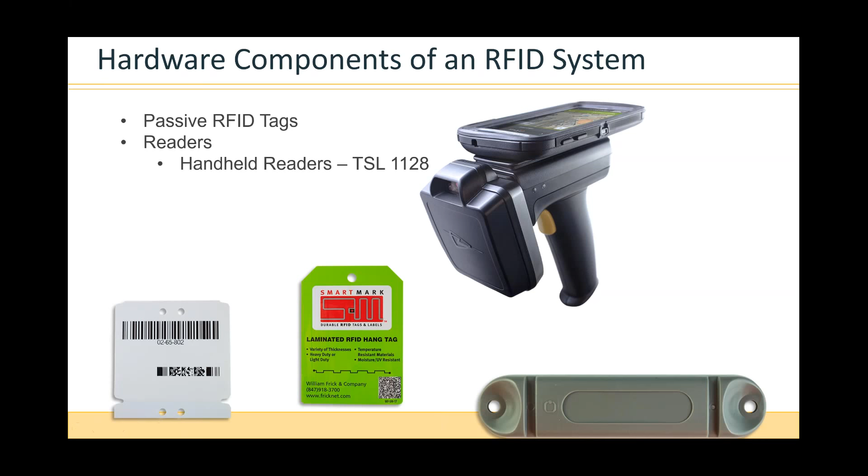So what are some of the components that make up a passive RFID system? Obviously you've got your passive RFID tags. That's kind of a no-brainer. You've got your readers. An example would be a handheld reader, like a TSL 1128. It's kind of a gun type reader. You've got an antenna here, and you've got a trigger to engage the RFID reader.

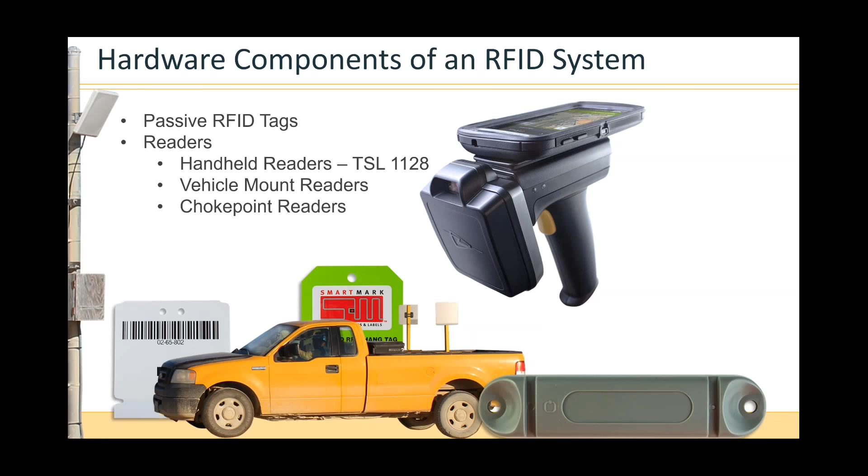You've got vehicle mount readers. So it's a truck that has antennas and a reader on the inside that can drive around your yards and pick up locations of RFID tags. Choke point readers. These are fixed readers at the entrance or exits of facilities that read tags. And obviously your mobile devices that compute the reads and push them into information for you to take action upon. So an example of a phone that could be used to pick up the RFID reads.

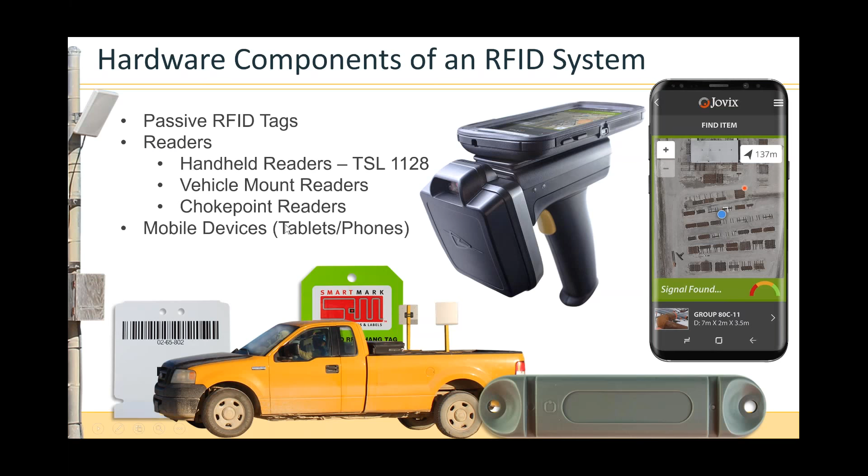So what are some of the tags that we're using in construction? Over the past few years, we've deployed millions of RFID tags out into the construction industry. And the three examples that I'm going to show up here are some of the most common that we typically put out into the market space.

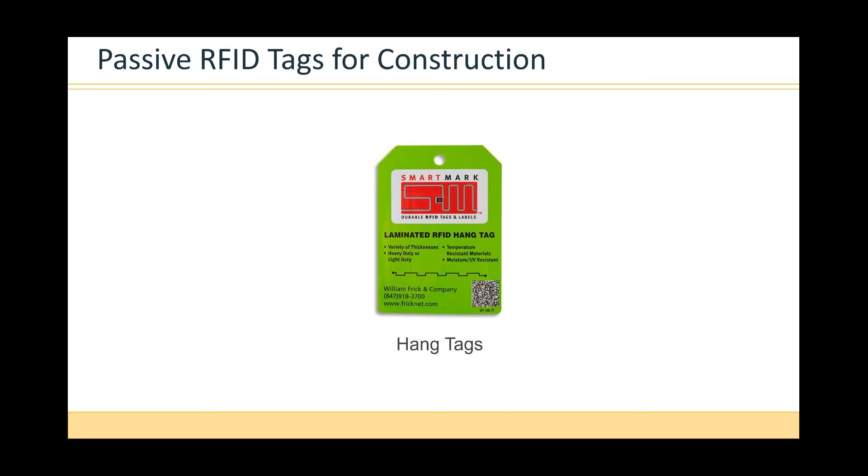So the first one here is called a William Frick. It's a type of hang tag. This is very, very durable, very thick. It's kind of a laminated type material. Temperature resistant and moisture and UV resistant, oil resistant. It's got a barcode on it for interacting with it. If you didn't have a passive reader, you could scan the barcode, and also having human readable content on the outside as well.

The next is a hard rugged tag, and this is an example of the XO 800 tag. It's an IP68 rated tag, so it's very durable. These are typically zip tied or chicken wired onto some pipe spools or onto structural steel. Could be zip tied onto cable reels. I'll show a few examples of that here in a minute.

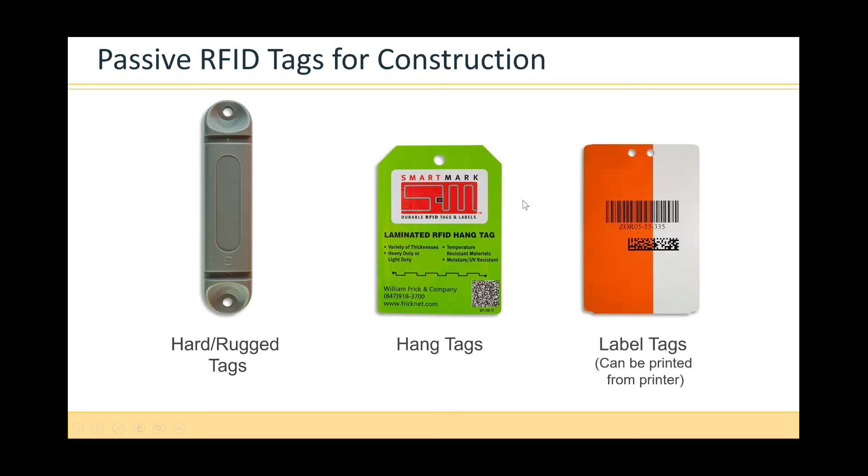And there's also label tags, so tags that can be printed from a printer, such as a Zebra printer, or they can print out rolls of different tags that can be adhered to materials, which also can have a barcode on the front of it and various bits of human readable content on it as well.

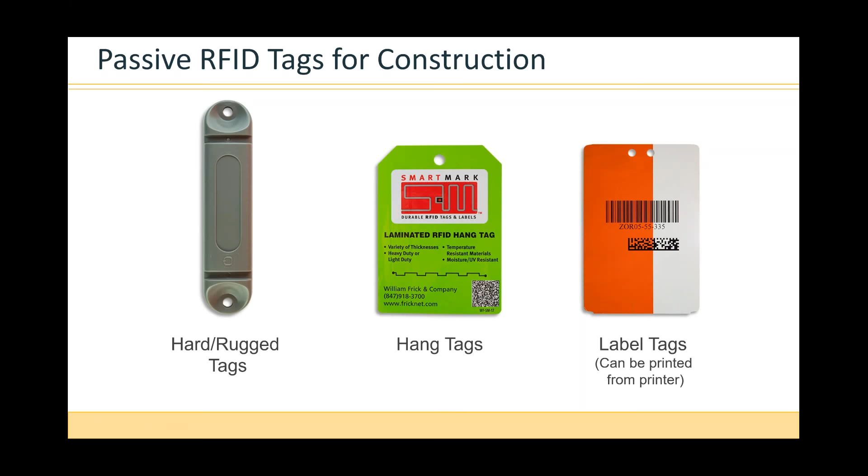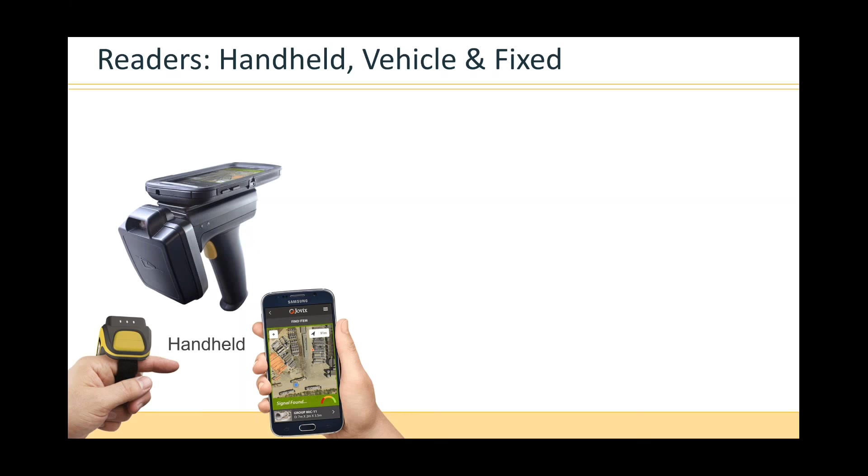And we have the vehicle mount reader. I touched on this earlier, but just get a little bit more in depth in this. So the vehicle reader consists of two antennas that run two antenna cables into a NEMA enclosure, which houses an RFID reader. That RFID reader is then run to a tablet in the cab, which computes the reads and then pushes that back to cloud-based software to update locations of assets in the laydown yard. All this can be hardwired directly to your battery. So when the car cranks up, the reader kicks on and away you go.

The next example of a reader are our fixed readers. These can be choke point readers at a fabricator shop or at a supplier shop, maybe at a marshaling yard, at your project entrance or exit. Even getting down into your laydown yards or work face entrance and exits to track your items via reads throughout your supply chain, whether it be intra-site or outside of your site throughout your kind of global supply chain, if you will.

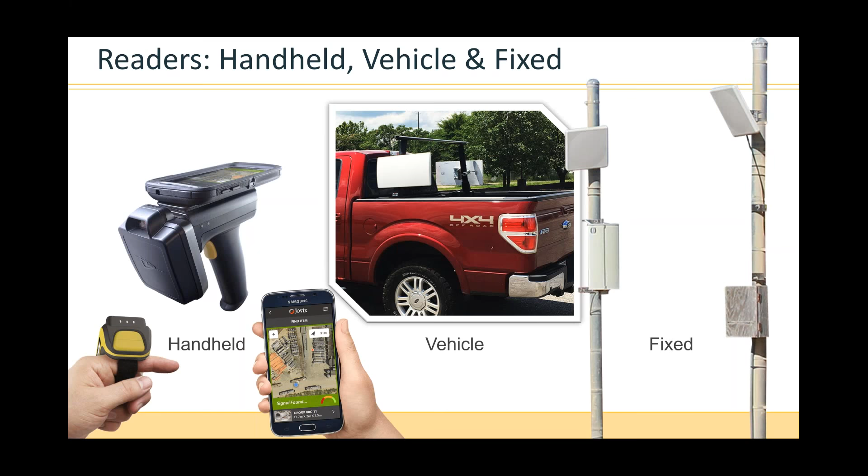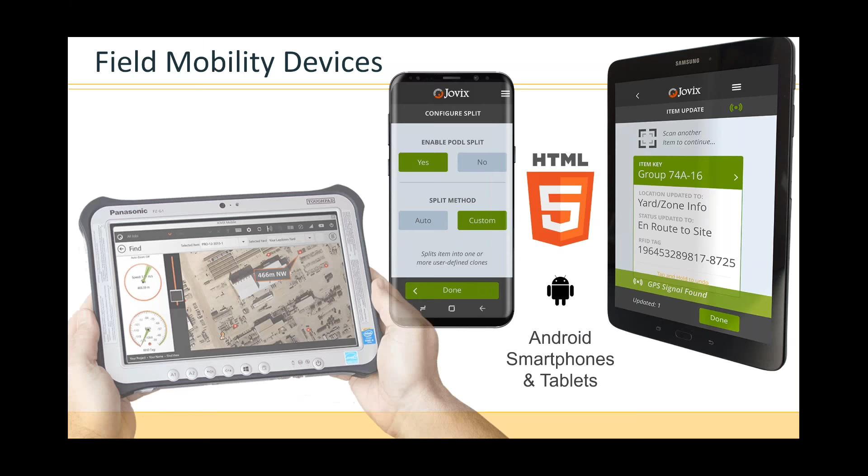So then you have field mobility devices. This is a major piece of the equipment as well that allows you to not only read the tags, but then compute that tag read into actionable data and conduct transactions with those materials throughout its life cycle. So these are two examples of Samsung tablets that are offered, and then your more workhorse type tablet would be your Panasonic ToughPad FZ-G1. Now this is our intrinsically safe type tablet that allows for use in an operating type capacity.

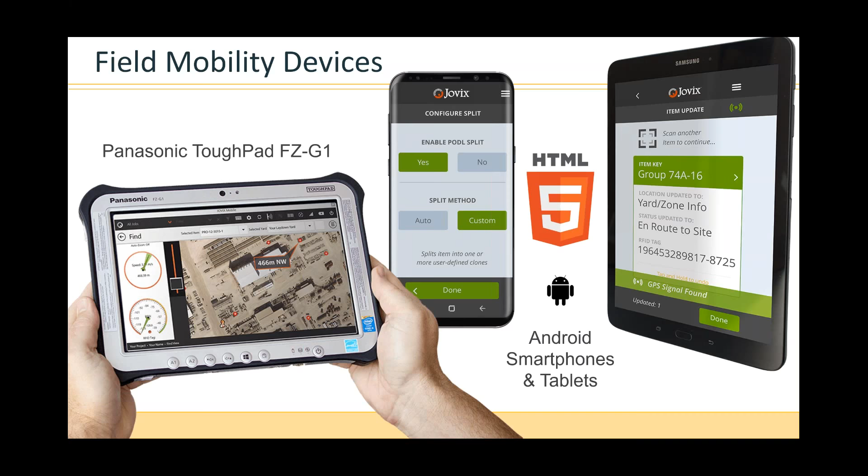So, I want to talk a little bit about testing, certification, and results. Before I go to the next slide, we've got a lot of great technology that I just went through and showed. Everything from a cheaper alternative RFID tag, a lower cost, to all the devices, to all the readers, and that's great, right? It's nice and pretty, but let's get to the real facts. Does it work in our industry? And that's been a major hurdle in terms of passive RFID tags in construction.

Some of the biggest hurdles are that it won't work because of the read range, right? The limitations of read range. My laydown yard is too big. I can't use it. They're all valid concerns, right? And you have the other concern of, I have a yard full of metal. Passive RFID tag doesn't work around metal. Well, we can sit there and listen to that, or we can actually go out and try and put a solution that does work. And that's really where we went.

And we started driving testing and certification and trying to understand, bottom line, the goal was feasibility. Can passive RFID tags be used in a construction laydown yard application? The answer is yes. I'm 100% convinced of that. We're convinced of it, and it's being used today to provide great results and great value. So let's talk a little bit about how we actually did that testing to confirm that it would work, right?

So I think there's a couple different things. You can have an RFID tag in a basement office or in a workspace where everything's real shiny and everything reads great. And yeah, you can say, okay, it's great, let's go sell it, right? But until you actually get out in the real world and put tags on materials, see how they work in a laydown yard, you don't have a solution.

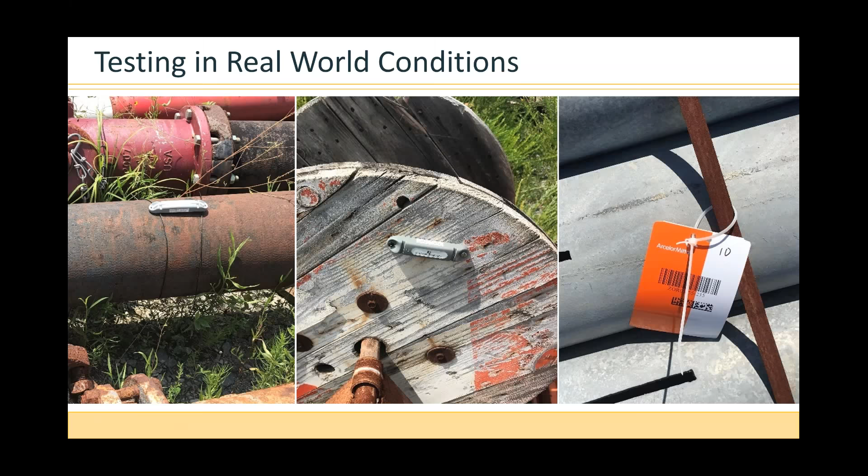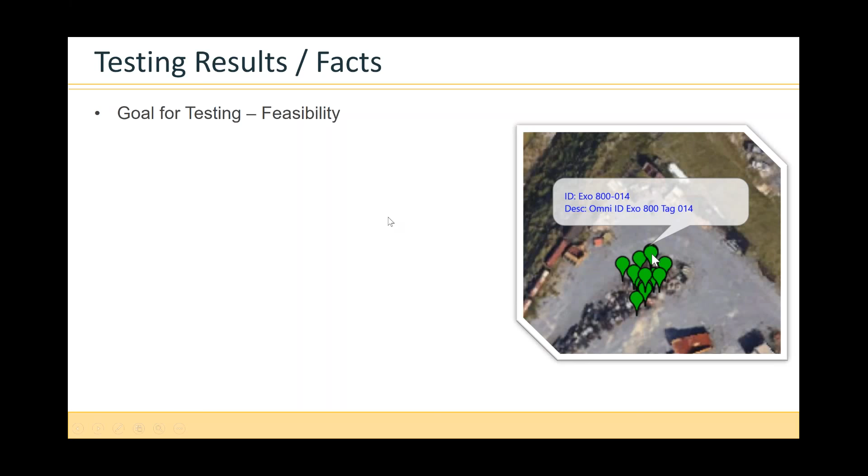But as I mentioned, the goal for testing was feasibility. So we thought to ourselves, we're not going to be able to test this without the help from a construction partner, right? So we're based in Birmingham, Alabama, and we got linked up with a local construction firm, SAIIA Construction, whose primary focus is underground development for residential and commercial. So they run a lot of the sewer pipes and a lot of the power lines for these commercial and residential developments. So they had a huge yard here in Fultondale that was full of surplus materials.

So they use these materials every once in a while, but most of the time they sat idle up there and nobody really went into the yard. So it's kind of the whole saying, one man's junk's another man's treasure, right? So we went out to this yard for a period of months, honestly, and attached hundreds of passive RFID tags to the materials in the yard at random. We hid some. We made them very difficult, covered in metal, just not the old happy path, right, sitting on top, because honestly, you're not going to have the happy path every time in the real world. So our testing had to be real world focused.

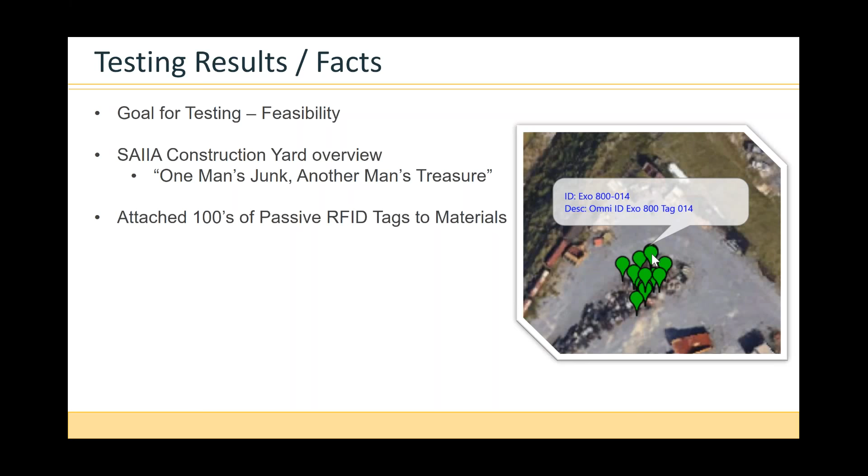So by putting all these tags on the materials, we also brought out our vehicle mount reader and then swept the laydown yards, located the tags, and did it continuously, and got averages of GPS distance, accuracy, and also the signal strength that was coming off of the tags, because the biggest misconceptions were the signal strength was too low and the tags will not work around metal. That was completely proven false.

We saw an average GPS accuracy of under 3 meters, which is incredible. So what that means is if you have a piece of material out in the laydown yard, you put a passive RFID tag on it, you sweep it, you can navigate to that within under 3 meters. Couple that with an RFID reader, and I'll show an example of this in a minute. You can get pinpoint accuracy on location of your materials with a passive RFID system in a laydown.

Some of the other facts that we saw, the longest read range that we had with the VMR, vehicle mount reader antenna, was 16 meters, which is pretty significant for a passive RFID tag. I think it's somewhere over 50 foot. I don't have a converter in front of me, but about 50 foot on that. And we were consistently reading at 10 meters. And that's significant right there. And I'll show why here in a minute, but the 10 meter consistent read range is very, very important.

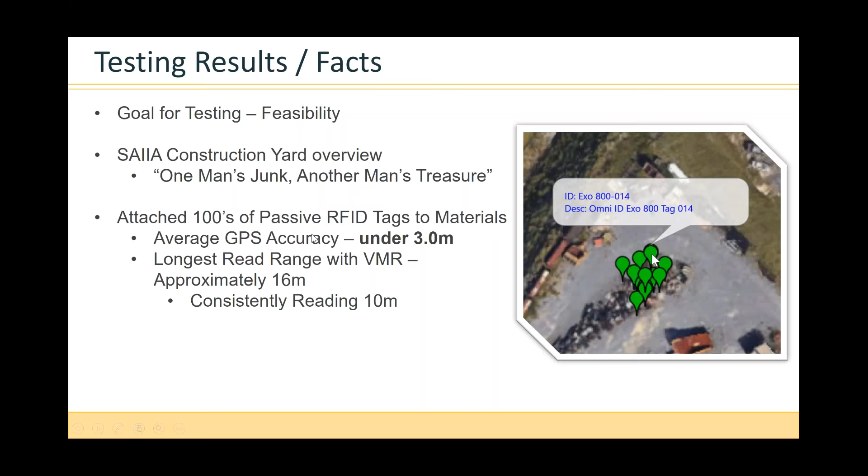So by going out and confirming in the real world that it works, we have a viable solution that can start providing value to our clients. So how is it being used today? I really want to kind of get down into the use cases.

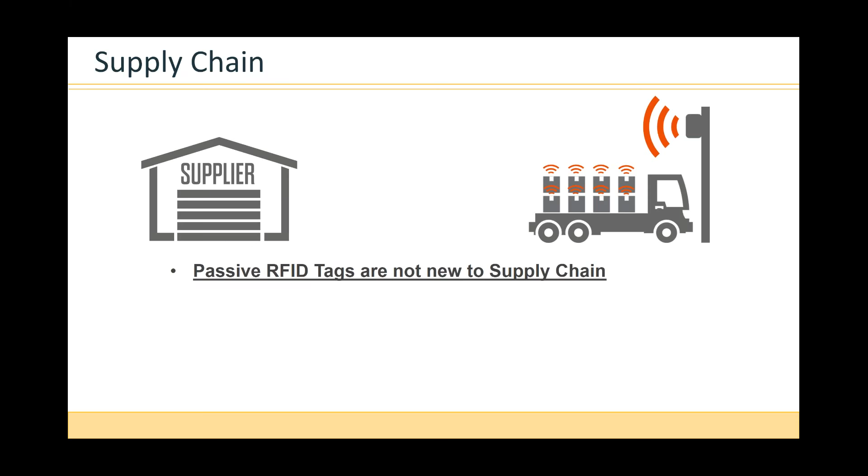So in supply chain, passive RFID tags is not a new concept, right? So many of the larger retail, Amazon, Walmart, have been using passive RFID tags in supply chain for many years, right? It's starting to be more and more adopted within the construction supply chain, and a lot of great values coming out of it. So, tagging upstream at a vendor and supplier in construction, at some of your major equipment providers, your fabricators, allows for almost an automated expediting.

So you can see when tags are being placed on materials and being broken out, put in separate crates, and you can have this electronic packing list creation of assets that are inbound to your job site or going throughout your supply chain. And then also coupling that by leveraging downstream technologies such as gate readers to provide real-time data. So being able to know when a crate full of components has left your fabricator, being read at a marshaling yard, at a staging yard, when it hits your project gate, all the way through when it hits your laydown yard, down to the very smallest part.

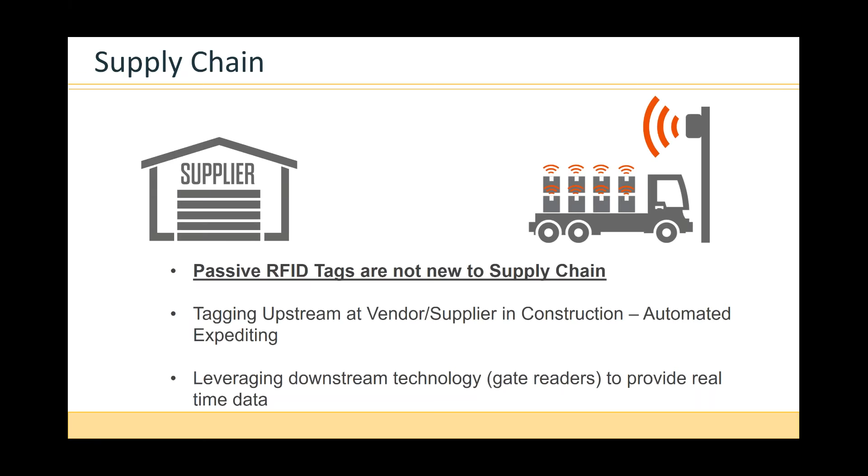So very, very powerful in terms of supply chain visibility and providing data that's very, very accurate, that's not based on just email conversations back and forth between expediters and suppliers. It's really real-time data now.

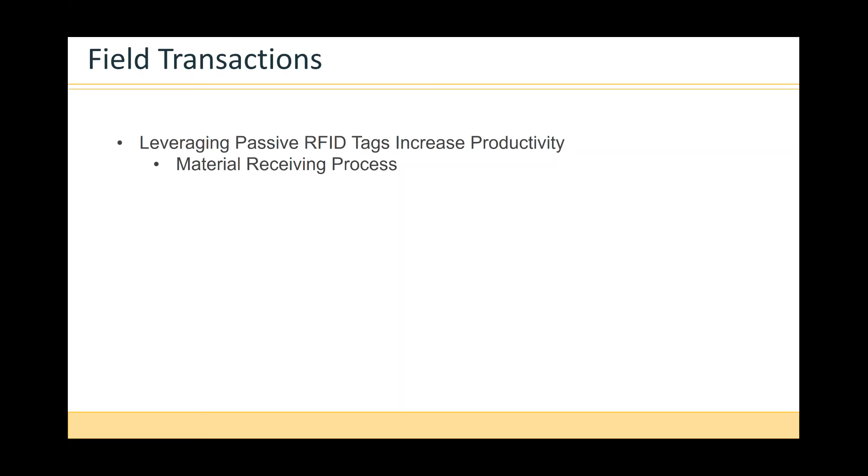So another use case of passive RFID is for field transactions. So, leveraging passive RFID tags increases productivity. You take your traditional way of material receiving: truck comes in, you get the bill of lading, they give you a packing list, and you go through and you check off the items on a piece of paper. Well, now by leveraging passive RFID tag functionality, you can scan those assets. You can open the crate, scan the contents of the crate, and know what's there. So productivity in the material receiving process is greatly improved.

Your warehouse management and laydown yard management. So no more location change adjustment paperwork. So this is one that is very important. So you move 10 assets in your laydown yard or into your warehouse. The vehicle of getting that updated into a system is typically a piece of paper called a location change or an inventory adjustment, whatever you want to call it. You write down what asset you moved, what location it moved from, and where it moved to, then key that into the system. Now, being able to have everything passive RFID tagged, you can walk around with a reader, engage that reader, scan and update the locations of the assets to eliminate those transactional updates of location changes.

And then inspections of materials. So as you're doing preservation and maintenance or any other type of inspection of an asset, you positively identify that asset. And I'll talk a little bit about positive identification through RFID here in a minute, kind of on the supplier end, but always be able to know by scanning that asset what asset you're actually looking at. Maybe the hang tag provided by the vendor fell off or something along those lines, but having that passive RFID tag on there, you can always positively identify that.

And then picking material. So this is one that has traditionally been the main focus of RFID in construction, and that is your typical track and trace, right? That's pretty much how RFID got started in construction: I need to find my item faster, and that was typically done with active RFID tags. Now, with passive RFID tags, you have a lower cost of entry, thus you can saturate more of your materials, thus increasing your productivity when it comes to finding materials in the field. Various studies have shown utilizing RFID tags, a form of auto identification, can allow you to locate assets 9 times faster during the picking process. So that's significant in terms of productivity.

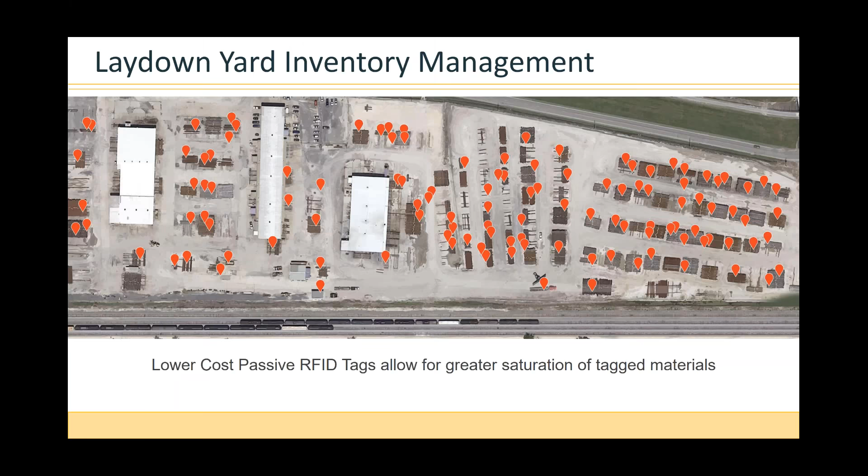So we talked a little bit about how RFID is being used through supply chain, through field transactions, through laydown yard management. The next piece I want to talk about is really strategies for success, how to implement. So when we've identified that RFID is a fit for our company, we need to look at the strategies to make implementation successful, because you can have the greatest piece of technology in the world, but if you don't implement it properly, train properly, and have work processes to support that technology, it will fail. It will fail. It's not a magic bullet. I think that's a major misconception in the industry. So what are some of the strategies for implementation?

So I'm going to get very cliche, right? Start early. That's a pretty cliche statement, but it's true. It's very, very true. So supplier engagement. What I mean by that is, okay, if you're engaging a supplier and you've developed the RFID system and process for your project execution, you need to get your suppliers on board if you want to tag upstream. So being able to write your contract language to specifically state what's the expectation of the supplier during the bid phase is extremely important, because they're still trying to win work and they're more likely to participate in your system and in your requirements during the bid phase.

So start early, write it in the contract language of what's expected by the supplier. Understand their willingness to participate. So are they on board or are they not, right? If they're not, develop a plan for that. Maybe it's a data management plan. There's various ways to get the suppliers on board and have them participate, and most likely they'd be willing to participate.

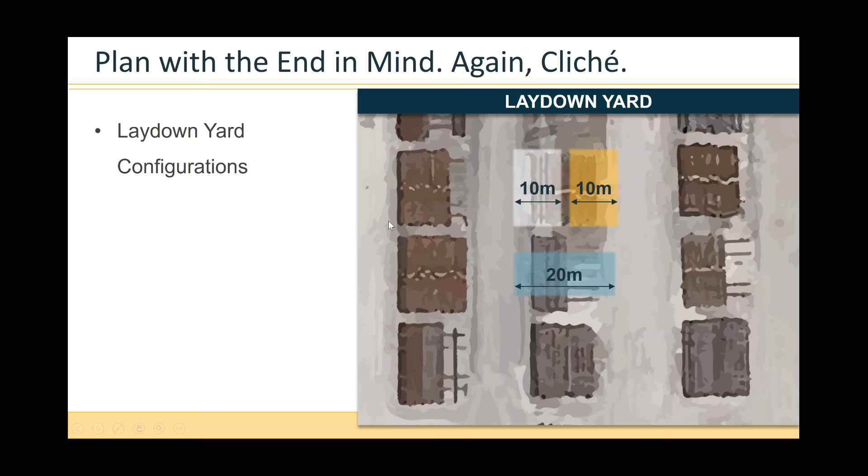But if your read range is 10 meters, you can drive a truck through here and be able to pick up this grid, pick up that grid, no problem. You can pick up all your materials without actually having to go inside of your grid and sweep. So start with the end in mind with your laydown configurations. Develop smaller grid locations, keep grid locations 10 meters by 10 meters and back to back, right? And that's not a major problem. That's most of how the grid locations are typically set up.

From what I've seen, and maybe it's not always the case, but if you keep that in mind when you're starting and implementing an RFID system, it will pay dividends in the end for you in terms of sweep potential. And then if you have that, the largest read range requirement for being swept is only 10 meters. So it's completely possible, completely feasible. So you have a truck here, 10 meters, truck there, 10 meters, and it's 20 meters wide. You can still get a boom truck in there and pick your spools, pick your steel, whatever it may be, to deliver to construction.

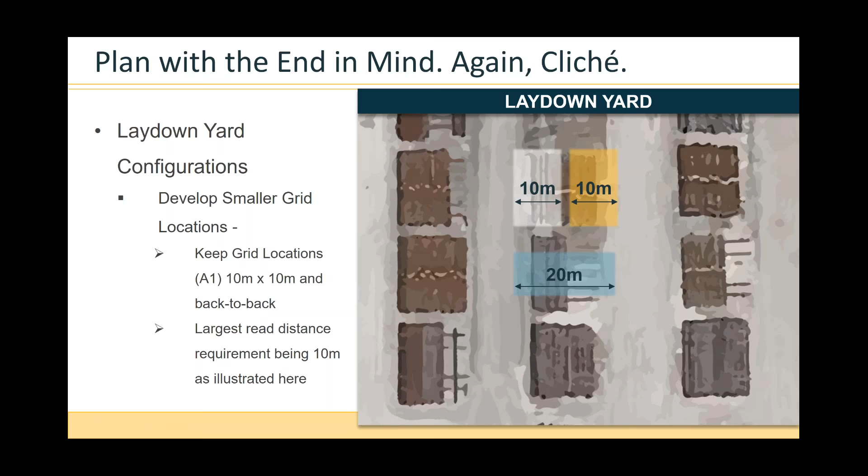So the next one is sweep patterns. So really focusing on strict work processes. As I mentioned earlier, you can have the greatest technology in the world and implement that on your project, but if you don't have the work processes to support the technology, it will most likely crumble. So you have to have strict work processes set in place. And this starts with sweep patterns.

So an active RFID tag sweep could typically be pretty loose, right? You could drive through the middle of the laydown yard and pick up tags around you because of the read range. That's why active has historically been extremely valuable in the industry and still is today. But with a passive RFID tag implementation, you have to be a little bit tighter on your sweeps. So I'm going to run a little illustration here to show what I mean by that.

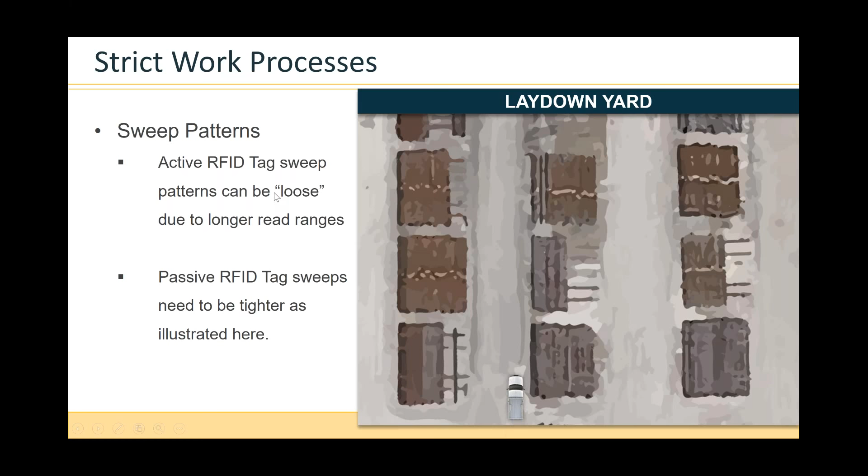So you've got your truck that comes into your laydown yard, and they need to hug the grid locations. Hug the grid locations on both sides, and that will allow for you to get that read range of the 10 meters and be able to pick up all the assets in your laydown yard. Whereas an active sweep, you may just drive down the middle and go forth.

So you have to be very conscious about your work processes when deploying a passive RFID system, and the value will be great. It'll pay for itself. But once again, support it with strict work processes.

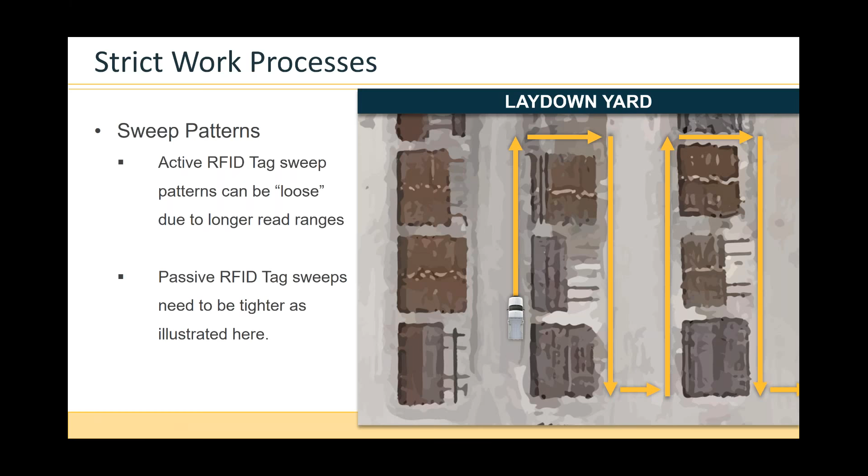So next, in line with strict work processes, is sweep frequency. So there's two vehicles of sweeping, right? There's obviously the vehicle mount reader, and then there's also the handheld reader, so kind of a foot sweep, if you will. So for a vehicle mount reader, there's two different types of sweeps. I really call them purposeful and background.

And so a purposeful sweep is a set schedule. So that may be, Jimmy, go get the truck every 2 days and drive all the laydown yards, every 3 days, every 4 days, whatever that may be, depending on the activity in your yard. That's a set strict work process that you develop at the beginning of a project.

And you have a background sweep. So that's kind of the secondary type sweep. So this could be an RFID reader that's placed on a vehicle that frequents a storage area. So a forklift, a foreman's gator, he's running back and forth in and out of the laydown yard. Have him engage the sweep as he's going from point A to point B, and it's sweeping everything around him. So you're kind of killing two birds with one stone at that point.

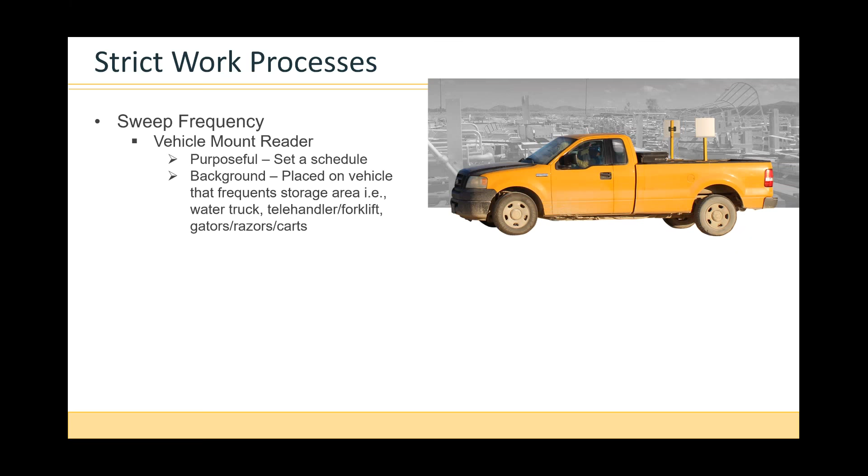Same thing with the handheld sweep. So get your TSL, get your phone, and walk out in the field once a week and sweep your laydown yard with the reader. And you can walk up in grids where it's safe to walk and just sweep around and get a lot closer than the vehicle could.

And this is just a supplemental sweep to your vehicle mount reader that's providing you, weekly, every couple of days, whatever that sweep pattern is, a 100% cycle count of all your passive RFID tag material, so you know what's in your laydown yard and where it's at. I mean, that's significant in terms of planning and construction feasibility.

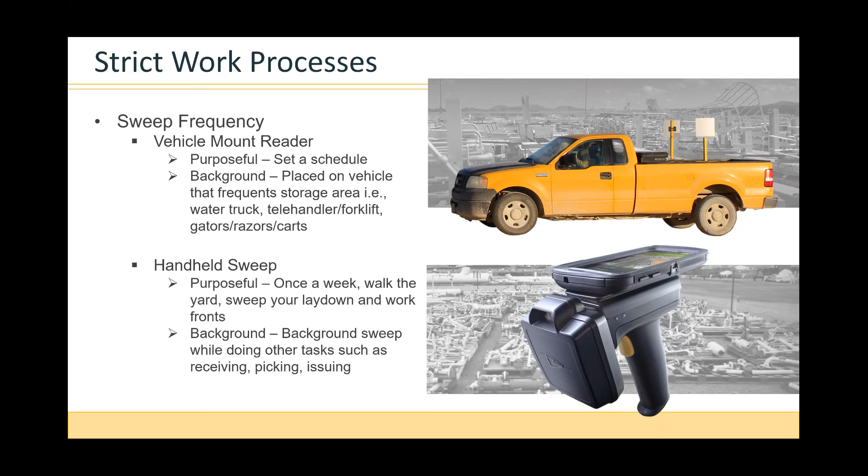And then same thing for the handheld sweep, kind of a background sweep. So engage the reader as you're out in the yard doing other activities. So as you're out receiving materials, engage the sweep, have it running in the background, and it's sweeping everything that you're walking around. So you're not purposely out there sweeping, but you're sweeping, again, killing two birds with one stone. So really focusing on work processes to support the technology.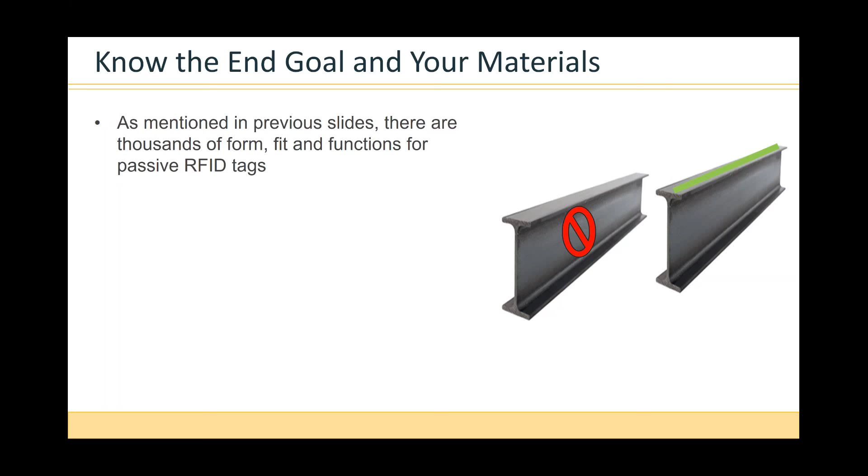And then know the end goal and your materials. So what I mean by that is there are thousands of form, fit, and functions for passive RFID tags out there in the industry. It's vitally important to select the proper tags for the application and how to apply them. So how we do it, we go through what's called a tagging strategy. So we take a look at all the materials that need to be tagged on the project and determine the best auto identification for those materials.

So for a passive RFID tag type deployment, there's thousands of form, fit, and functions out there, but we have a subset that we've certified, as I was mentioning in the previous slides, that work best on certain materials. So is it metal mount tags? Is it off metal? Is it on a wooden cable reel? So these are things to think about that, as a consultant, we can help drive through that tagging strategy to ensure that the proper tag is selected.

Next part of that is you may select the right tag, but how are you applying it? So if you've got a pipe and you've got a tag that's metal mount and you put it inside that pipe, it's not gonna do any good. It's not gonna read through there. The signal will be attenuated. So you need to make sure that's placed on the outside. And you've got to make sure it's placed in a spot that's not going to get crushed.

So if you see the example to the right here, I've got a couple of I-beams. You don't really want to put that up under the channel here because that obviously would have the signal attenuated. So maybe you could put it on top. One of the things to consider is if you're stacking these, the top wouldn't be feasible. You have a hang tag off here.

So really trying to look and understand how your materials are going to be managed. Are you going to bundle your steel? Are you going to send them piece by piece? Really affects your overall tagging strategy on a project.

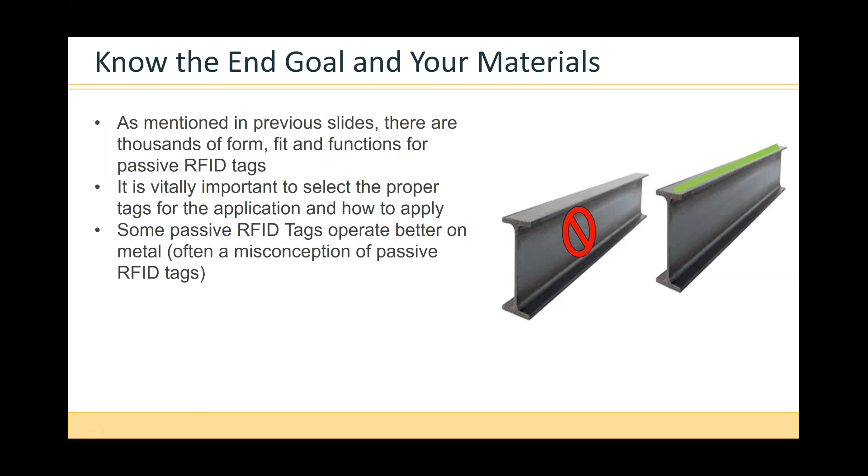So in this example, I've got one passive tag that's exactly the same. And I placed them one on metal, one off metal at exactly the same distance, to be able to show that the metal mount tag actually works better on metal, right? Thus the name. So it kind of debunks the myth of passive RFID tags not working well around metal. So turn your volume up. I'm going to start this quick little video.

Oh, there we go. So this is a metal mount tag on metal. Engage the reader. And note where it gets the RSSI signal strength meter up to. This is not on metal, same distance, same tag. It's less strong.

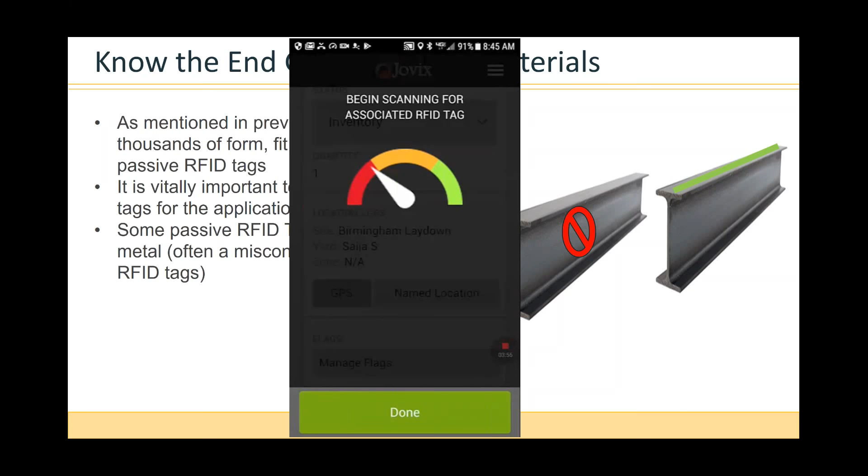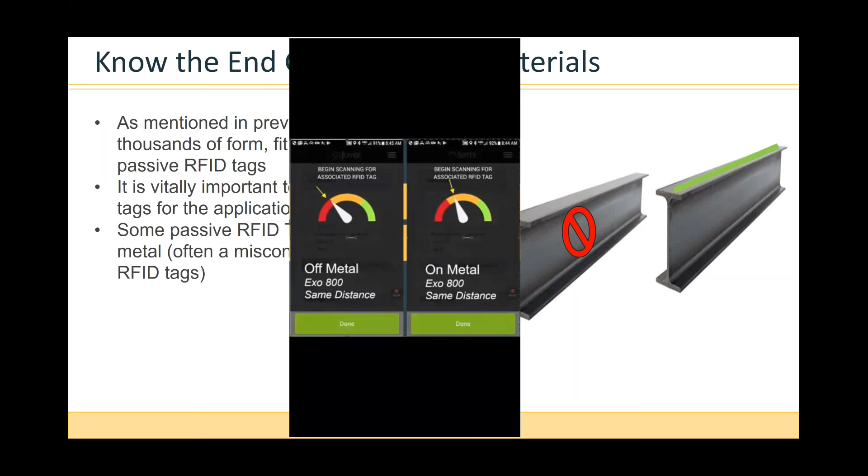So you notice here, the metal mount tag actually performed better on metal. So that kind of debunks the mentality that passive tags won't work on metal. So it's a pretty interesting thing to look at, and that reinforces the know your materials and know what you're putting on them, and ensure that you're putting the right tag for the application, not only in the right spot, but overall make sure it's just the right tag, because not every passive tag will work on every single piece of material. So it's very important to start that process and focus on that.

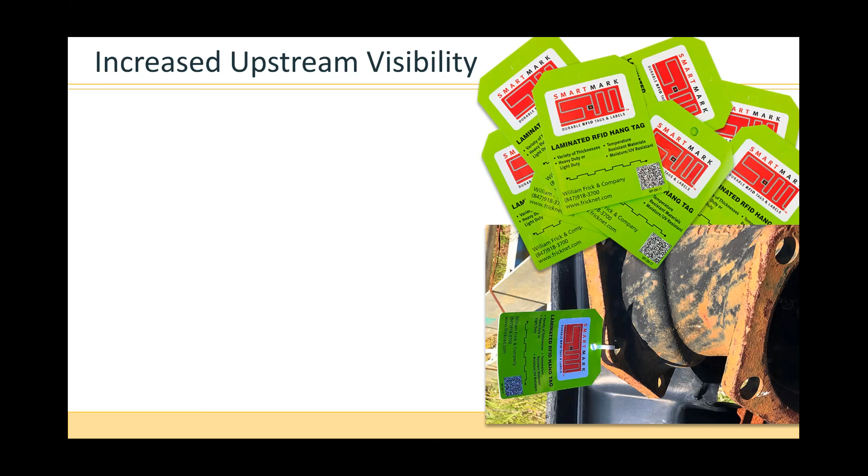So we're going to talk a little bit about the value of the system, what we're seeing out there with these tags that have been deployed. So obviously increased upstream visibility. Passive RFID tags are not new to supply chain, but they're new to construction supply chain, if you will. So some of the things that we're seeing out there is visibility into vendor supply packages of components. This is the dreaded term, ship loose components, right? Items come to site in one lot and there's 5 truckloads of it.

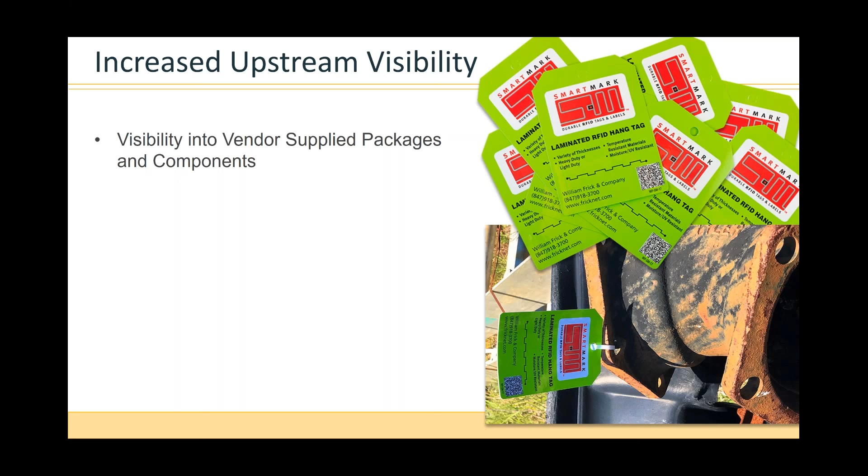But if you're actually going upstream and RFID tagging or identifying those items one by one, or at least by a crate level, box level, you're able to see what's inbound to your job site and have an electronic packing list. So really elimination of a common question: what crate is Thermowell 204-TW-001 in from vendor XYZ? Well, now you know. Now you can see what crate it's in, when it was scanned last through a gate reader, maybe at your fabricator, maybe at your supplier, maybe at your project site, but increase that upstream visibility in your supply chain. So one lot elimination is key.

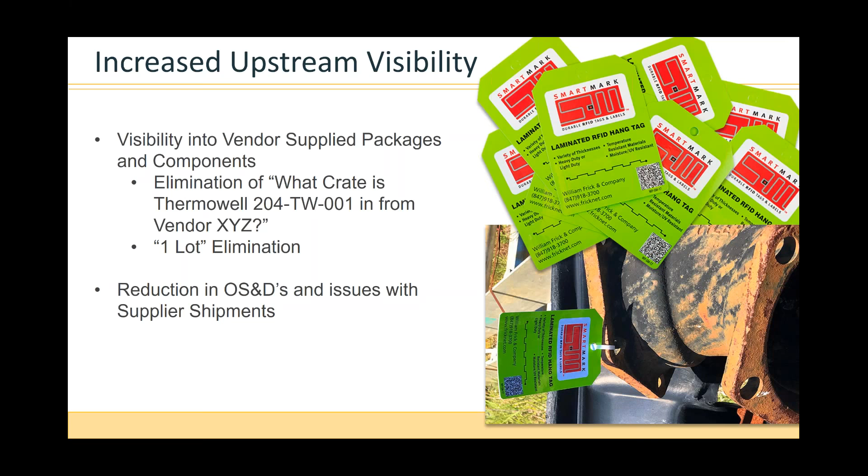And then reduction in OS&Ds and issues with supplier shipments. So if you have an automated way to receive your materials and you're engaging an RFID reader and scanning those RFID tags, you're pre-populating a list of what's expected versus what's there, and it's creating OS&Ds. And not only that, but preventing having an OS&D come to site because the supplier is more involved in touching the items rather than just dumping them into a crate. They're identifying, they're tagging them prior to them coming to site. So accurate counts and accurate item identification is key.

So then automated transactions. So as I discussed, reduce transaction time. So the ability to scan a passive RFID tag to populate a list of what's in a crate, what's on the truck, versus what was expected, significantly reduces the manual counting exercises. So engaging a reader over the top of a crate rather than checking off line by line on a piece of paper what items are in that crate. I mean, I don't think I have to explain it. It obviously improves transaction time and worker productivity significantly.

So, temporarily misplaced materials. This one's key. A traditional metric that we've used for any track and trace deployment over the years has been the term temporarily misplaced materials. I don't like to use the word lost materials. I'm a former materials manager, and we never lose anything. We may just temporarily misplace it for a minute.

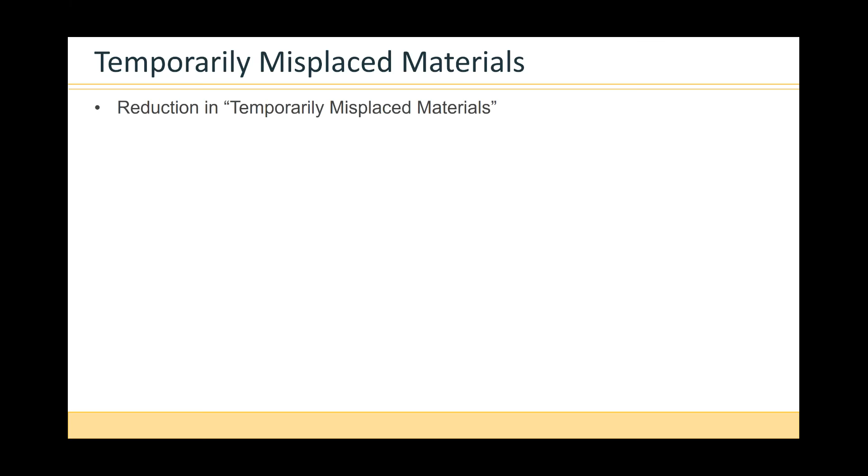Well, whether you lose it or you temporarily misplace it, it's an impact to your project and to your cost, right? So you want to put metrics in place to avoid temporarily misplacing your materials. You can do that by RFID tagging your assets. Once again, by having a lower cost of entry with a lower cost passive RFID tag that works fantastic on the laydown, you can saturate your materials more, right? And so it's a lower cost of entry for a smaller size project.

Various industry studies have shown that 9% of materials will be temporarily misplaced at some point in their life cycle. I'll show a graph here in a minute, kind of a busy chart, but I'll explain it. It basically says that at some point, 9% of your materials will have some issue. So Bob goes out, tries to find a spool, a valve, whatever it may be, and it's not in the location that it was supposed to be on the paperwork.

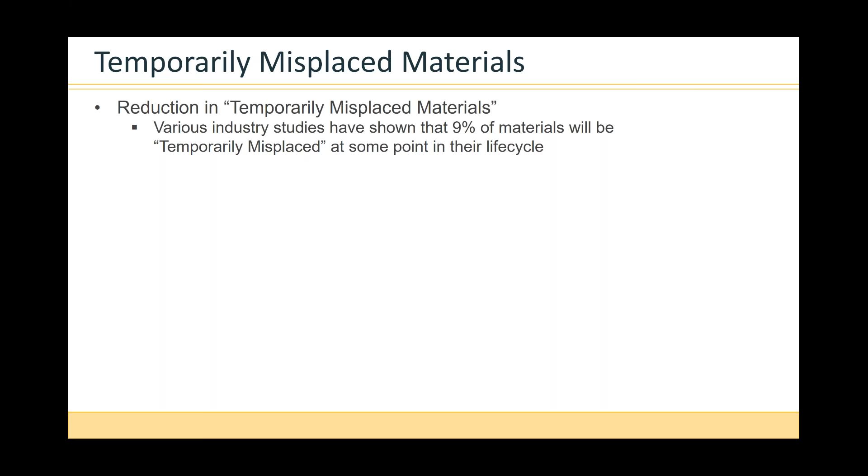So you've got to go back to the office and find the last known location, go talk to somebody else, go get Jerry because he can find everything in the field. And they go back out, spend a couple more hours. By the time you get 3 or 4 people involved, you've burned 30, 40 hours of time looking for a single item very quickly. That adds up significantly.

So if we get a chart here and we take, for example, 25,000 pieces of material that are RFID tagged in your laydown yard, let's focus strictly on the laydown yard. That may be spools, steel, control valves, cable reels. You can expect 9% of those to come up missing. Honestly, you're running a 91% accurate inventory. If we were working for Amazon or some facility like that, that's not very good, right? They're running a 99% accurate inventory.

But in a construction yard where it's a temporary facility, it's chaos, the pirate ship on land, a 91, 92% accurate inventory is pretty daggum good. But that 9% causes issues and costs money. So let's eliminate that 9%. That means that, on average, 2,200 items out of 25,000 will have some sort of issue in terms of locating or being able to identify.

If we break that down and look at an all-in labor rate of $50, plug in whatever you want for your project, that comes out to a significant cost in terms of hours to locate. Not all 2,200 of those are going to take 40 hours to locate, only a small subsection of those. And you come down really quickly, on 25,000 items at a $50 rate, to $1.3 million in cost avoidance, or cost to your project if you were to spend the time looking for those 9% temporarily misplaced materials.

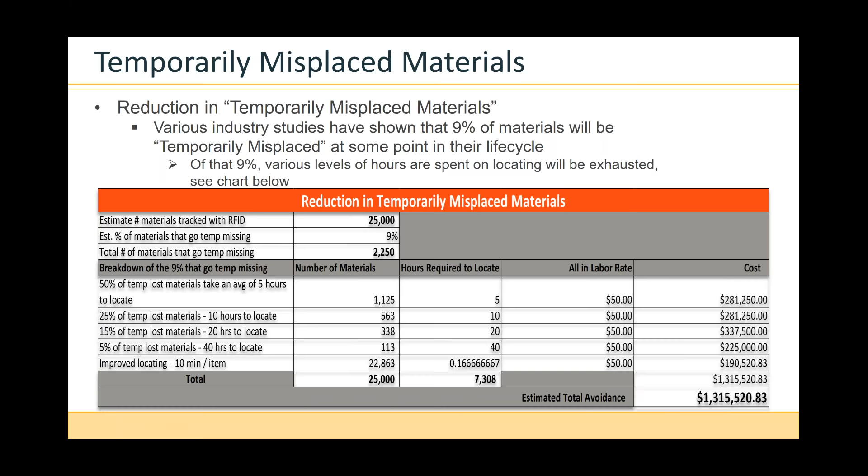So what I'm really getting at here is that passive RFID tags combined, very important part, combined with proper work processes will eradicate temporarily misplaced materials on your project and ultimately avoid significant cost to your project.

So what I mean by that, this is your traditional track and trace, a real quick video. Once again, turn up your volume. In this example, this is a track and trace with passive RFID. Many of you may have seen track and trace with active RFID. This is a track and trace using, I think it was a Samsung S8, a TSL 1128, and an XO 800 passive RFID tag in a laydown yard at our test yard.

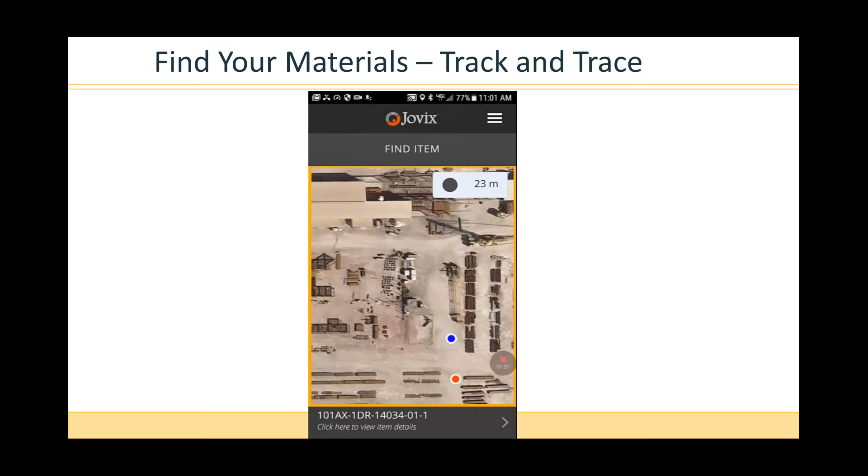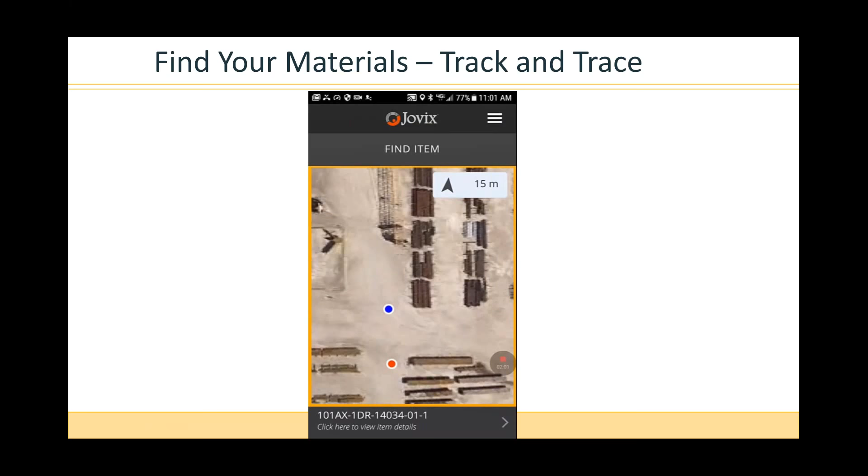So I'll go ahead and start this quick video. The worker can find this asset 101AX. You see a map. The blue is the worker, the red is the material, and it tells you how far away you are from that material. As you get closer, you'll hear the reader engage, and then it'll zero you in right on top of that material.

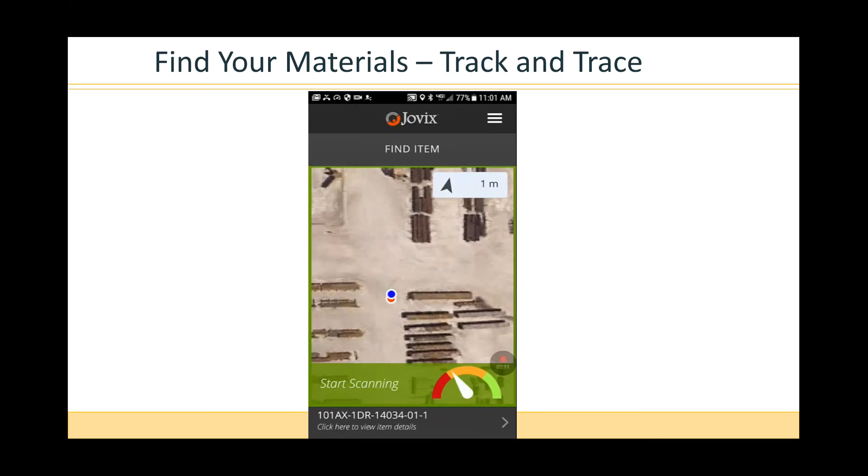RFID reader's engaged. And you see now it goes up, boom. There you go. You've successfully found the item you're looking for, 101AX1DR. And that's with passive RFID tags. It navigates you to that GPS location under 3 meters, and then the RFID reader will engage and zero you in like a metal detector.

So kind of wrapping up here a little bit, just want to talk about data production. RFID provides a very, very unique data set, and really not around transactions. I mean, all that's great. You can do cycle times and you can understand how your workers are performing and interacting with materials. That's important. But one of the most significant things that RFID provides is really material movements. And you can learn a lot about material movement.

So why and how are materials moving? If you take, for example, you've got a yard full of cable reels and they're constantly moving, you might ask yourself, why are they moving? Why are they moving from grid A1 to B1? There may be a good reason, there may not. Every one of those material movements puts your worker in line of fire. It's a safety exposure. Every time you're lifting something on a job site, it exposes your worker to safety risk.

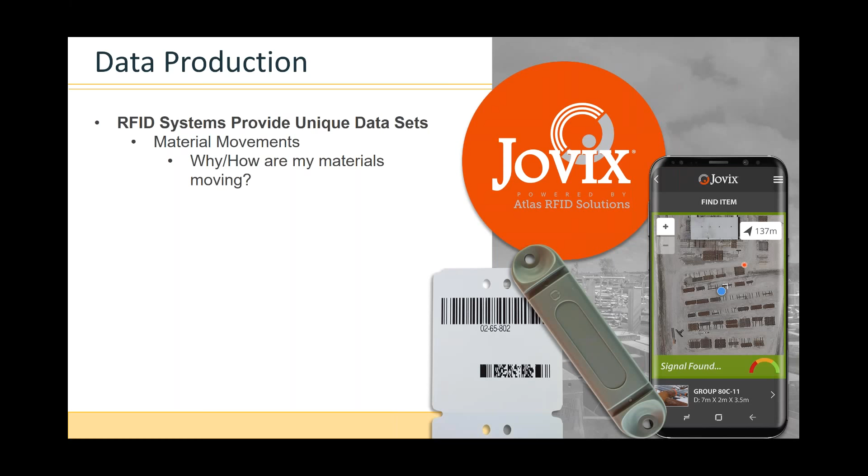So if you can take the data that's provided from an RFID system that tells you how many times items are moving about your job site, you start asking the questions, why? Maybe I should put my laydown yard in a different location. Maybe I should plan better in terms of the size of my laydown yard so I don't have to keep shuffling items. Whatever it may be, it allows for a data set that otherwise would require a single person in the laydown yard with a clipboard all day, every day, capturing locations of materials. So double handling equals safety risk, right? The cable reel example.

Once again, with passive RFID technology, it's an affordable solution, and it allows for more items to be RFID tagged. And with more items RFID tagged, you get a larger set of data, right? But I'll put a thing in there. One of the things that you see oftentimes, in any industry, not just construction, is don't just collect data to collect data. Make sure that you're collecting, number one, useful data, and then taking that data and turning it into action, right?

So if you're getting this information from an RFID system that's telling you, hey, you're moving these items 5, 6, 7 times, don't just shrug your shoulders and put it on a shelf and move on to the next project. Analyze that, understand why, because you're ultimately putting your workers in harm's way, and you could use that data derived from an RFID system in a very helpful way, and maybe send somebody home at the end of the day safely, who may have not had that opportunity.

So don't just collect it and put it on a shelf; collect it, analyze it, because collecting it and not using it costs money. It costs money to collect, it costs money to store data. Make sure that you're actually using it in a correct manner. Very simple question, but use data to get better, right?